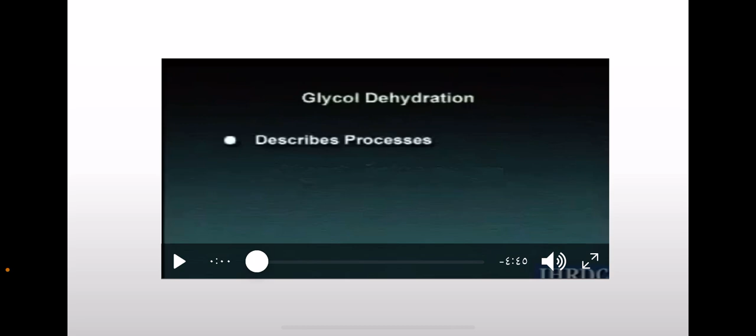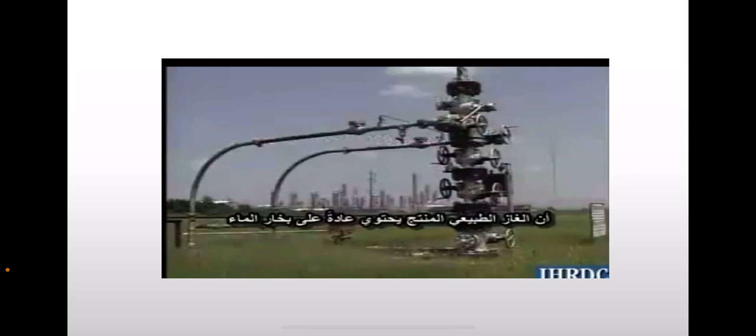Glycol dehydration processes and presents methods for specifying and sizing glycol units. Produced natural gas often contains water vapor.

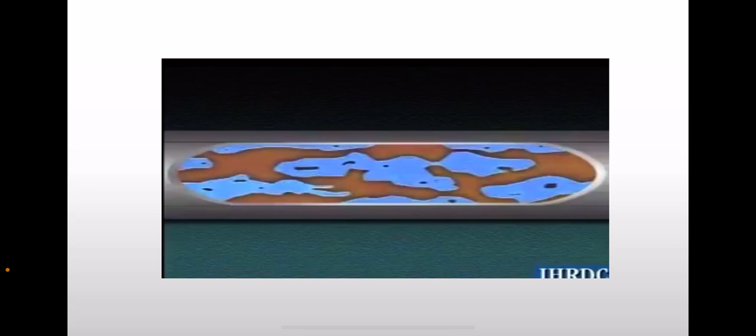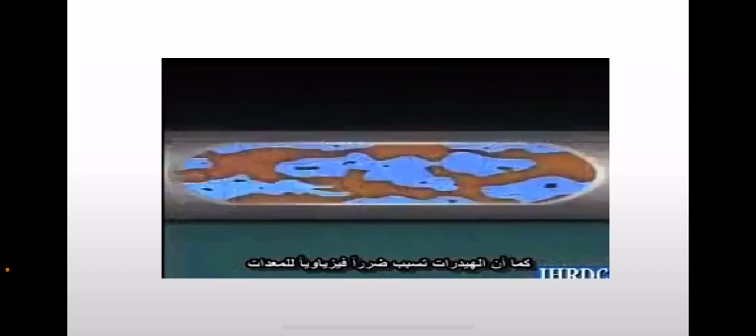When water vapor in gas lines cools, it forms hydrates, a crystal-like compound of hydrocarbon and water, which looks like dirty ice. When hydrates form, they accumulate in valves and fittings, thereby blocking or restricting gas flow. Hydrates can also cause physical damage to equipment. Slugs of hydrates moving through a pipeline can produce high-impact forces at valves, orifice plates, and other line restrictions.

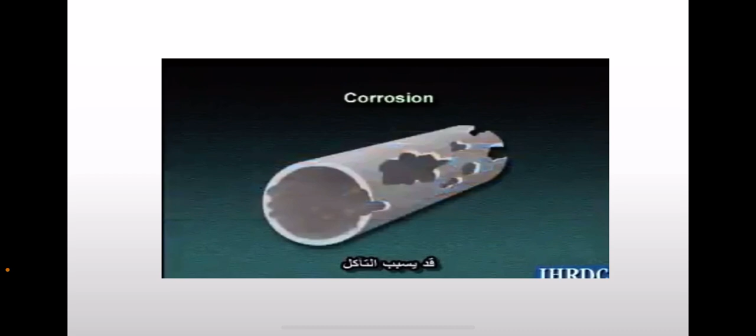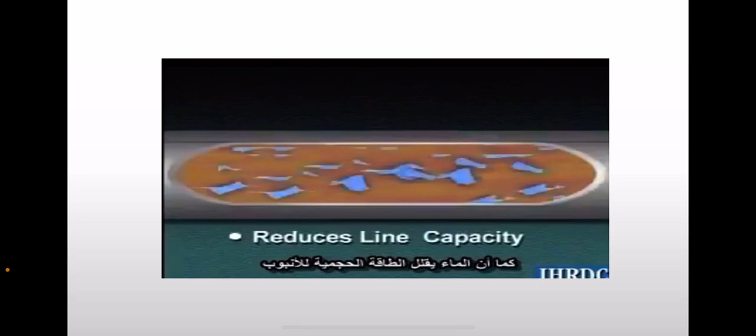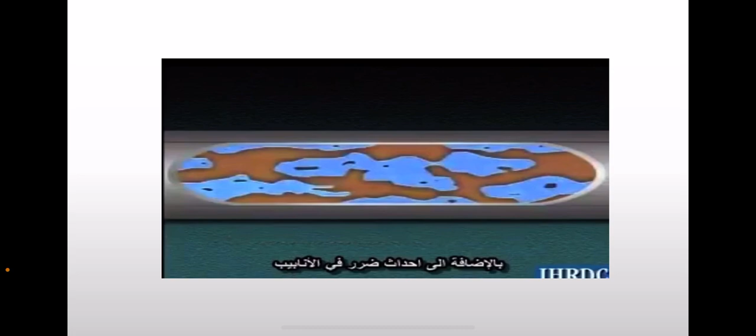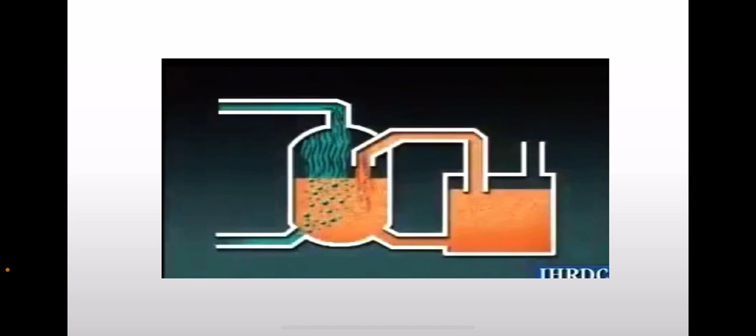Moreover, water condensing in a gas stream can cause corrosion, especially if the gas contains carbon dioxide or hydrogen sulfide. Also, water in gas lines reduces the line capacity, increases the pressure drop, and can produce undesirable or damaging slugging in pipelines. To eliminate such problems, gas sales contracts usually specify a maximum amount of allowable water vapor in the gas. The process of removing water vapor from a gas stream is called gas dehydration.

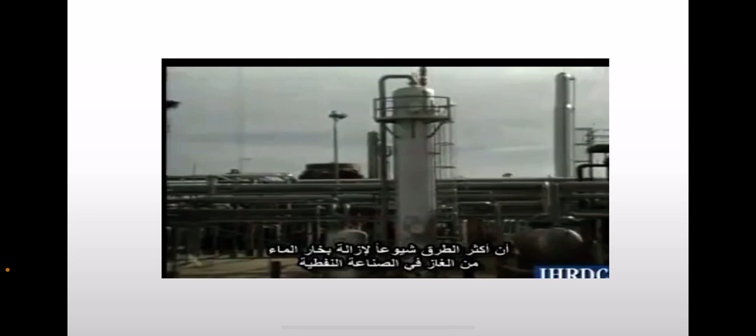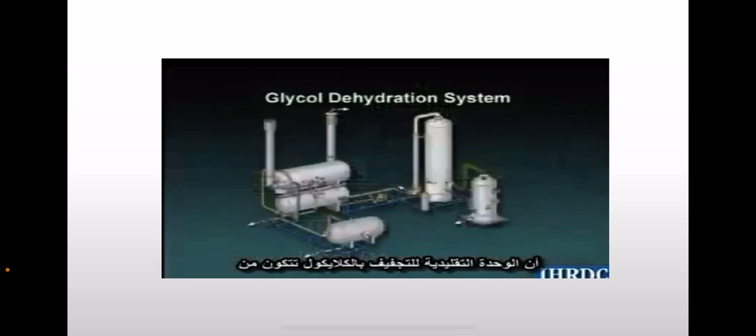In the petroleum industry, the most common method of removing water vapor from gas streams is glycol dehydration. A typical glycol dehydration unit consists of an inlet separator, glycol contactor, glycol reboiler, glycol pumps, filters, and a heat exchanger.

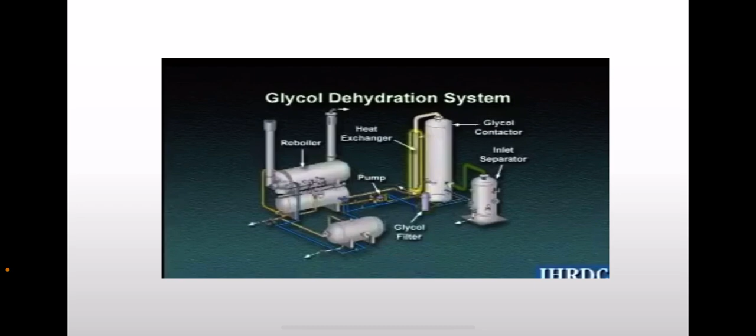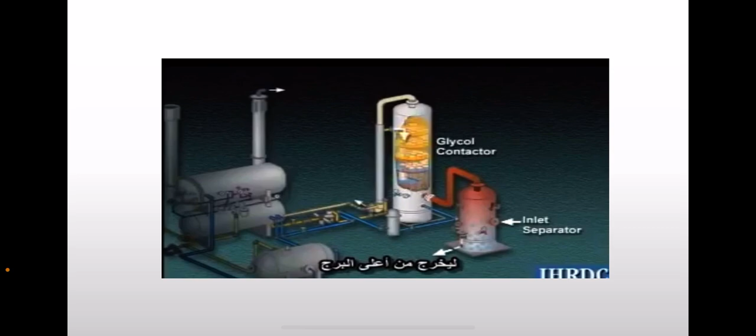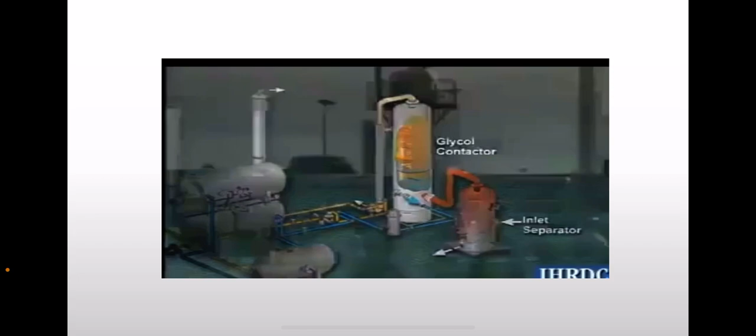Wet gas enters through an inlet separator, where any free liquids are removed before going to the glycol contactor. The gas enters the bottom of the glycol contactor and flows up through the vessel, exiting at the top of the tower. Dry or lean glycol enters the top of the tower and flows down through the vessel, exiting at the bottom of the contactor. The glycol and gas are mixed on the trays, as they flow counter-current to each other.

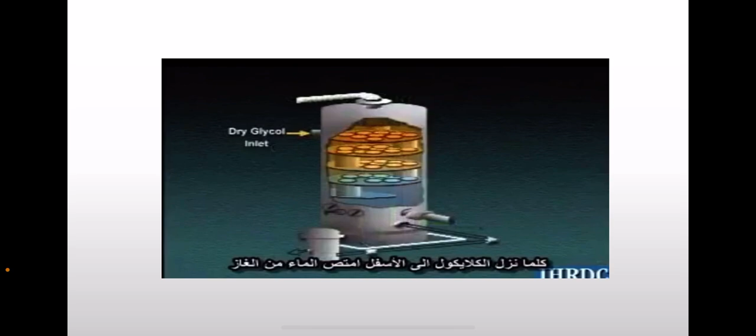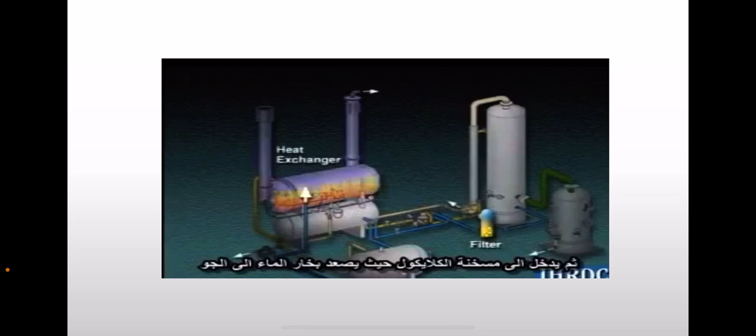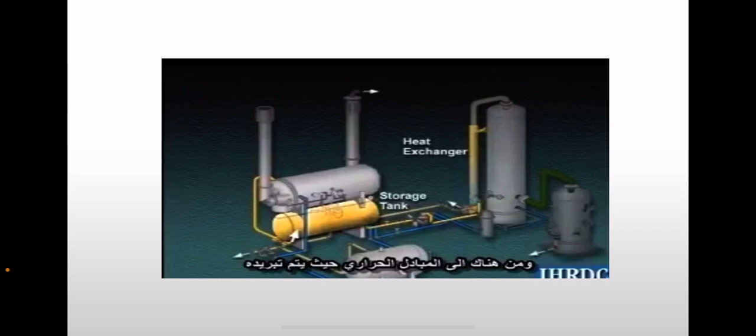As the glycol flows down, it picks up water from the gas and becomes wet or rich glycol. The wet glycol leaves the tower and goes through filters to remove solids and dissolved hydrocarbon traces. Then it enters a heat exchanger in the reboiler, where the water vapors are driven off to the atmosphere. The hot regenerated lean glycol goes to a storage tank, and from there to a heat exchanger, where it is cooled. Then it is pumped back to the top of the contactor, and the process repeats.

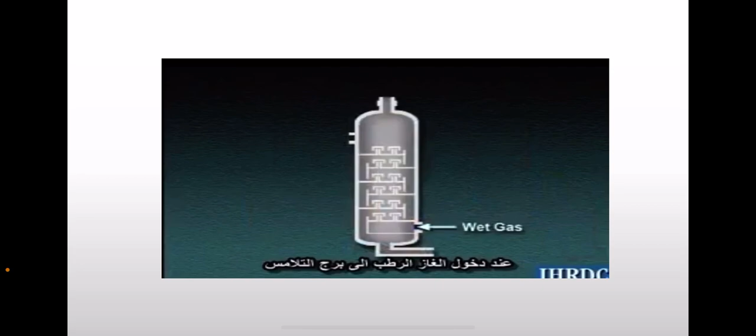As the wet inlet gas enters the contactor, the water vapor is removed as the gas flows up the contactor and is mixed with the glycol. The gas becomes drier as it goes from tray to tray up the contactor. The dry gas finally leaves the contactor through the top of the vessel.

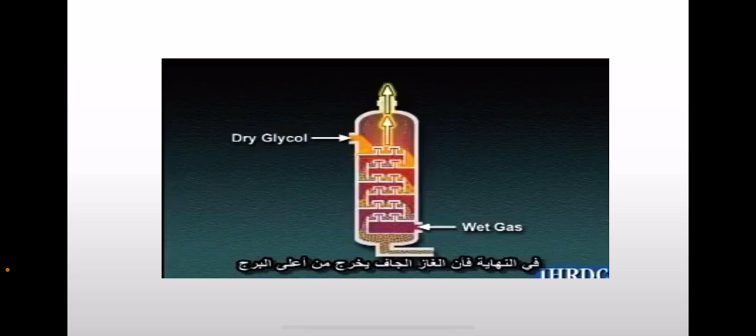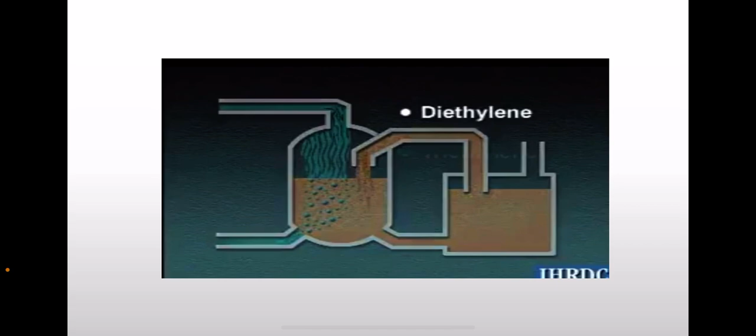The types of glycol that are commonly used in dehydration units are diethylene glycol, triethylene glycol, and tetraethylene glycol. Diethylene glycol is the least expensive, but it cannot be regenerated to a high purity as the others. Triethylene glycol, also known as TEG, is the most commonly used type.

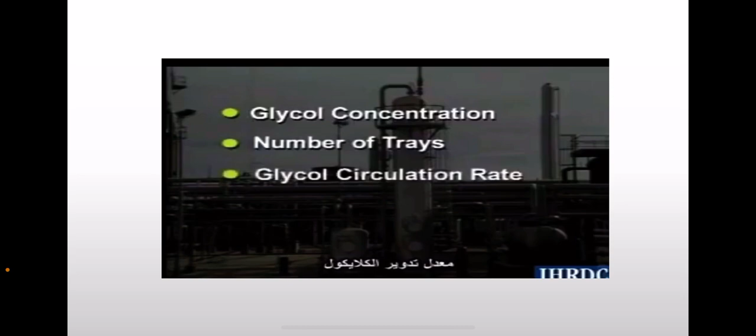In sizing a glycol dehydration unit, several design parameters need to be considered, including glycol concentration, number of trays, glycol circulation rate, and equilibrium data for TEG water vapor solution.